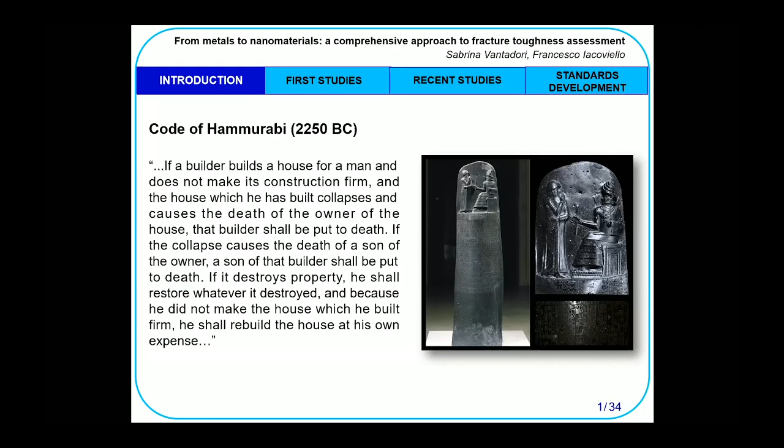Structural integrity was always an important issue for humanity. Already more than 4,000 years ago, it was written in the Code of Hammurabi that several punishments were set for problems like collapses of houses, including the death of the builder or the death of the son of the builder. It's a very hard time to be son of the builder.

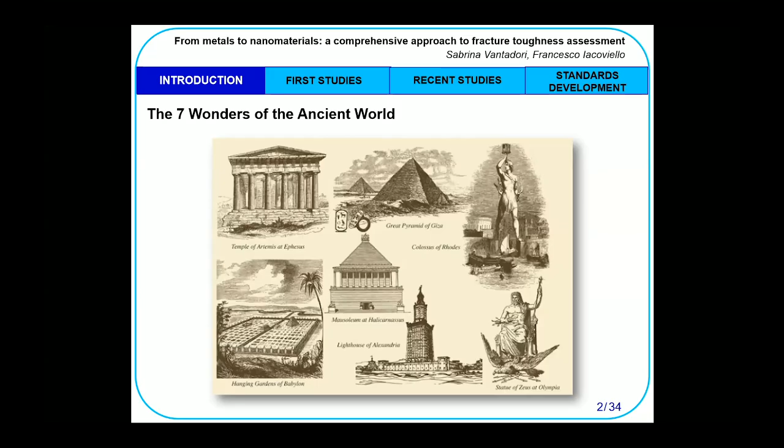Although they knew little about materials behavior and the principle of structural integrity, several wonders were built in the ancient world. Due to wars, earthquakes, and the passing of time, only one of them is still with us: the Pyramid of Giza. But we have some more recent wonders we can recall.

For example, the Pantheon's dome, which is up to now the world's largest unreinforced concrete dome, thanks to a combination of a coffered ceiling that reduces weight and the use of lighter materials like pumice or tufa for the upper rings.

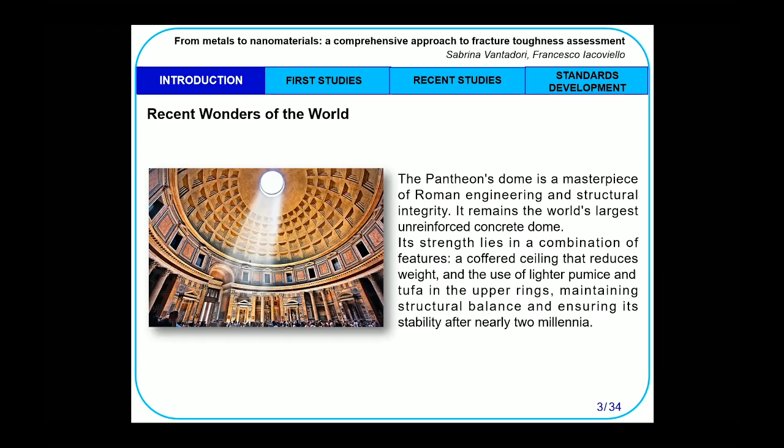We can also remember the Great Wall of China, which exhibits remarkable structural integrity despite its age and length. It is built with several materials, and it is one of the wonders of our world.

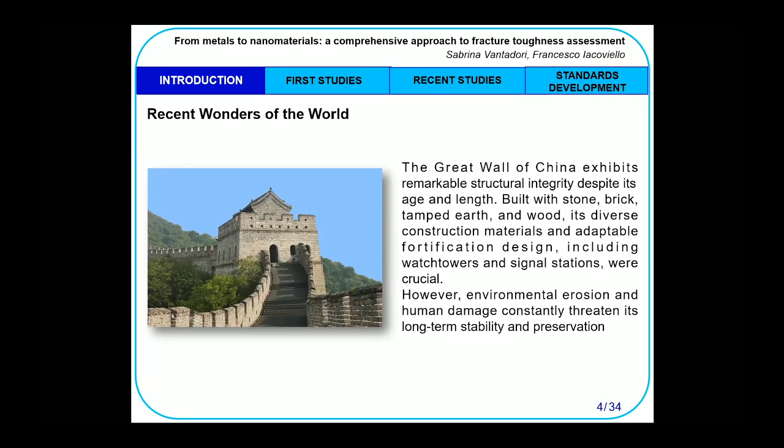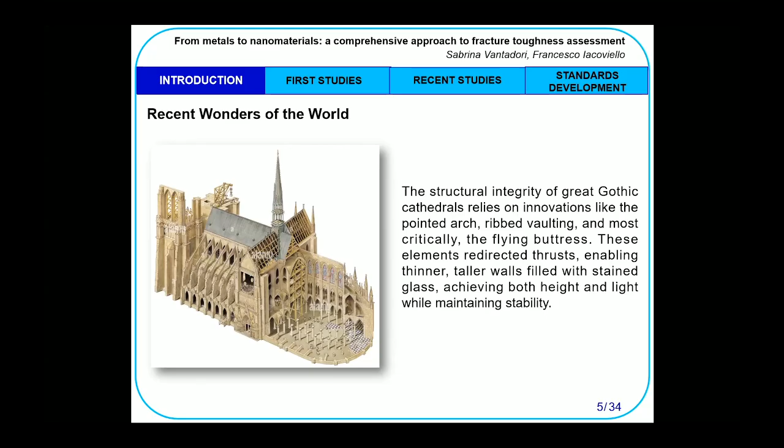And also we can recall the Gothic cathedrals, which show innovations like the pointed arch, rib vaulting, and the flying buttress. These allow higher walls with thinner thickness.

The first studies on the mechanical behavior of materials can be found with Leonardo da Vinci at the beginning of the 16th century, when he described in detail an experiment to measure the maximum weight sustainable by an iron wire, considering wires of different lengths. According to the thoughts of that age, he found that decreasing the length of the wire improved its resistance. But this was clearly a problem due to the limited capability for the production of these wires — with longer wires, the probability of having a defect was higher.

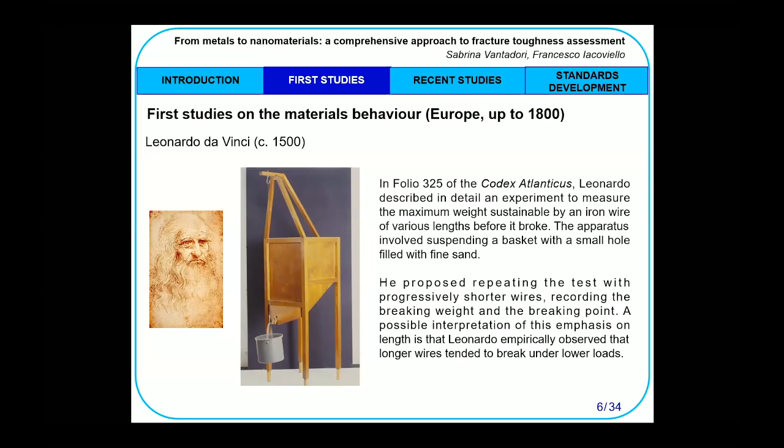One century after Leonardo da Vinci, we find the first scientific book dedicated to the study of materials: Discorsi e Dimostrazioni Matematiche Intorno a Due Nuove Scienze, by Galileo. There we find the first observation that the cross-section is the main geometrical parameter that should be considered for the mechanical resistance of a component, or specimen.

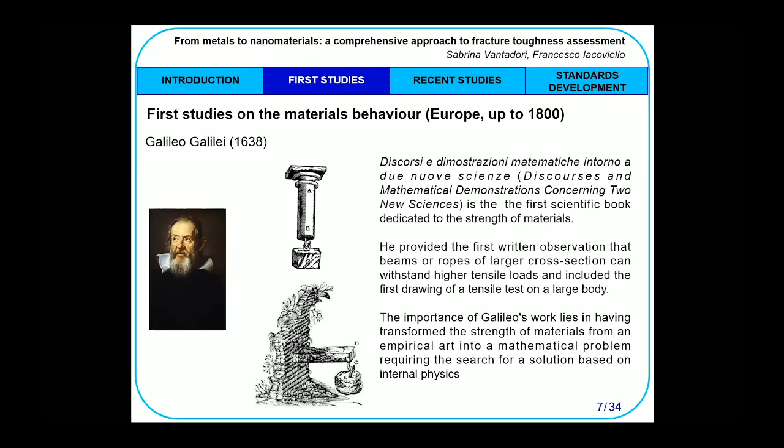In this case, we are talking about ropes, for example. We have the first drawing of a tensile test on a large body, and he also understood that the direction of loading was important in determining the mechanical behavior of a material.

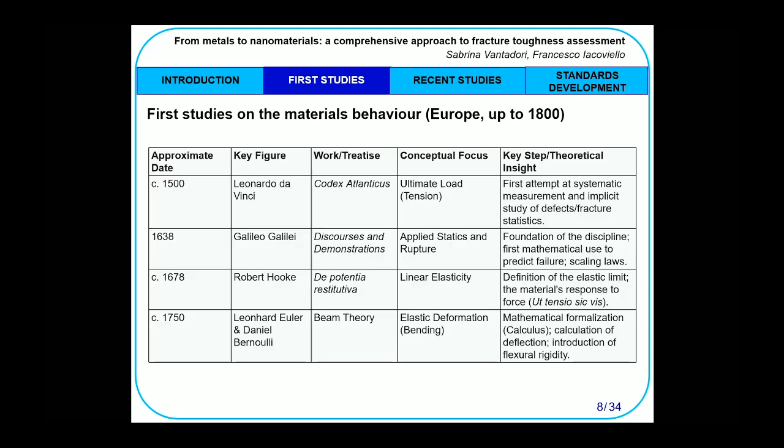In the years after, we have many other discoveries. For example, we can recall Robert Hooke, who was the first salaried scientist in European history, at least. We can recall the maxim 'ut tensio sic vis', which is the basis of linear elasticity.

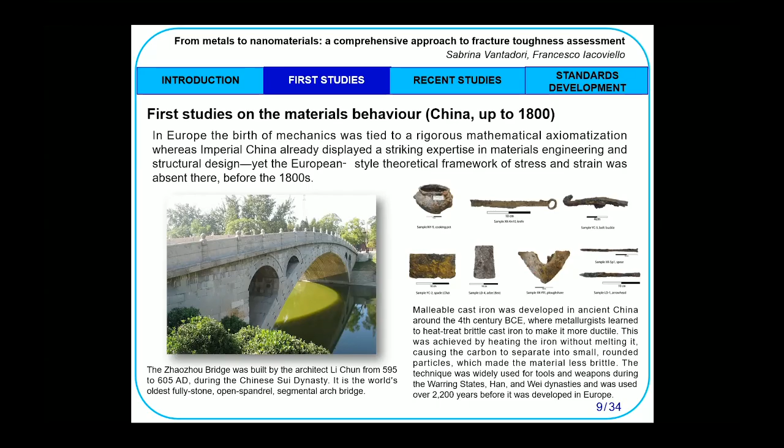Also, being a metallurgist, we can talk about malleable cast irons. These kinds of alloys were discovered in Europe at the end of the 18th century, but in China they were already produced in the 4th century before Christ — about 2,200 years before the discovery in Europe.

The crucial point for structural integrity is probably the Industrial Revolution. Up to the Industrial Revolution, the main components produced from metals were swords and guns, and the damaging mechanism was always connected mainly to overload.

With the Industrial Revolution, we have new ways of loading components, for example cyclic loadings, and we also have problems in some critical environments. So here we have a short list, but the problems became more evident.

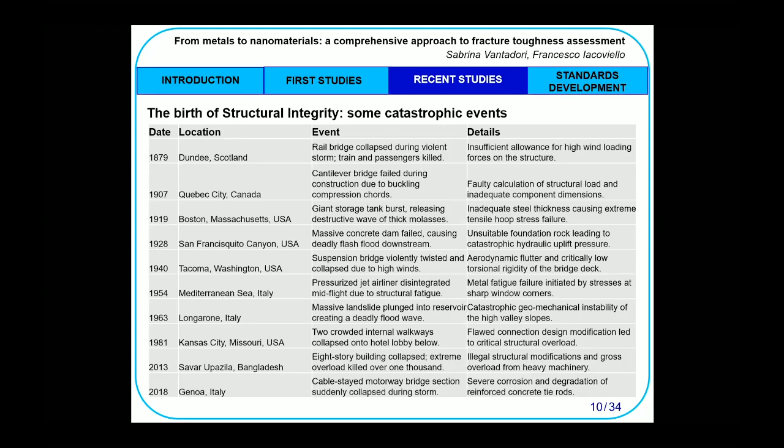A short list of catastrophes in the last two centuries concerning bridges, dams, trains, planes, etc. And with this revolution, we had a new damaging mechanism.

A really modern damaging mechanism is probably fatigue, because before the Industrial Revolution, repeated loading was not so frequent on a component. And as you can see, in the more or less 150 years, there are two approaches for the analysis of this mechanical behavior.

One approach was connected to analyzing the damaging mechanism in alloys, meaning identification of the crack as the reason for these problems, because in the early 19th century researchers thought there was a sort of mysterious transformation of the structure of the material from ductile to brittle. Instead, for example, Rankine, Fairbairn, and Ewing focused their attention on the nucleation and growth of fatigue cracks.

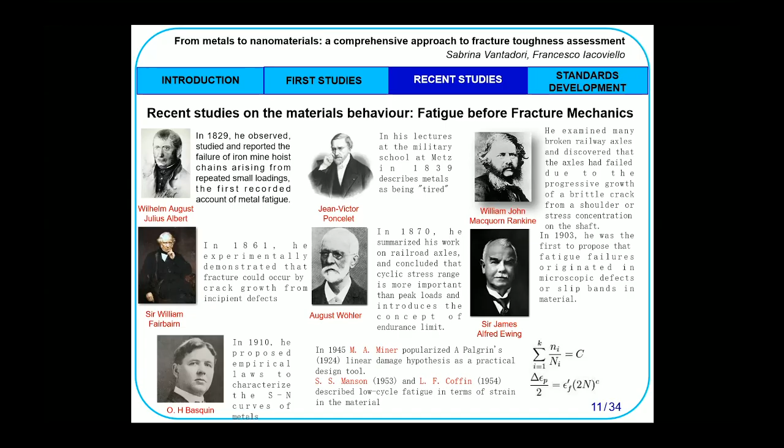But we also have another approach with the focus on fatigue life, determining the fatigue life for an applied cyclic load, for example with Wohler, on the determination of the infinite life condition.

At the end of the 19th century, it was clear that an approach based on the analysis of static load tensile data, or also the Wohler fatigue curves, must be reconsidered. You must remember that these fatigue curves were identified as Wohler curves only in the 1930s.

Anyway, it was evident that in case of sudden blow or severe environments, for example cold environments, these two approaches were not sufficient. In this case, the optimization of the Charpy test was clearly a new approach to analyze the behavior of components and materials.

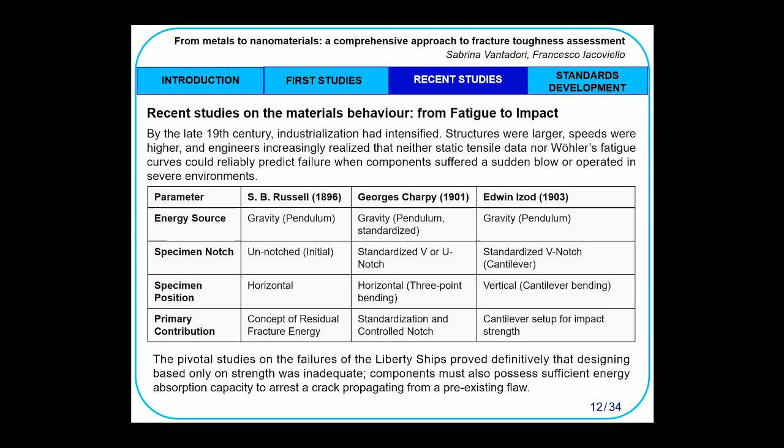This approach was really important. For example, it was the basis for the solution of the Liberty ships problems. There were cracks that could create big problems on these ships, which were produced with extensive use of welding. It also allowed determination of the ductile to brittle transition temperature.

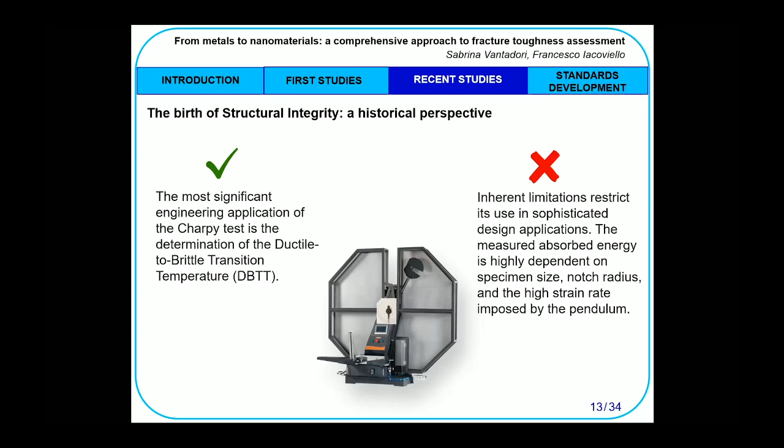But this test had some inherent limitations. First of all, as everybody here knows, the measured absorbed energy is highly dependent on the specimen size.

So in the beginning of the 20th century, we had the new science of fracture mechanics theory, with the first works of Griffith in 1920. Then we have Irwin in 1957 with the concept of K and K1C characterizing the brittle fracture resistance, the linear elastic fracture mechanics.

Obviously, J. Rice and the J-integral concept extended its applicability to elastic-plastic fracture mechanics. After this, there are obviously many other names, but I'm cutting for the limits of this presentation.

We have two important standards: ASTM E399, the standard test method for linear elastic plane strain fracture toughness of metallic materials, and the E1820 standard, the standardized method for measurements of fracture toughness.

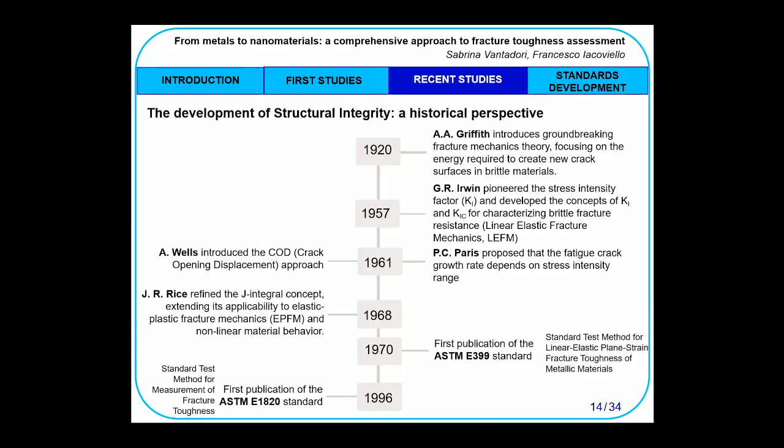Well, the path to these new standards is quite long. It was not determined in a few days or months. Just the year after Irwin's works, in 1958, the ASTM Technical Committee E24 on fracture testing of metals was established. In 1966, we had the E399-70T.

T stands for tentative standard. And after extensive round-robin test programs, only after that did we have, in 1970, the first publication of the E399 standard. Only 30 years after Irwin's results did we have the publication of the E1820 standard.

ASTM E1820 standard. And only 6 years ago, we had the new ASTM E1820 standard, removing the evaluation of K1C from this standard in order to avoid overlap with ASTM E399.

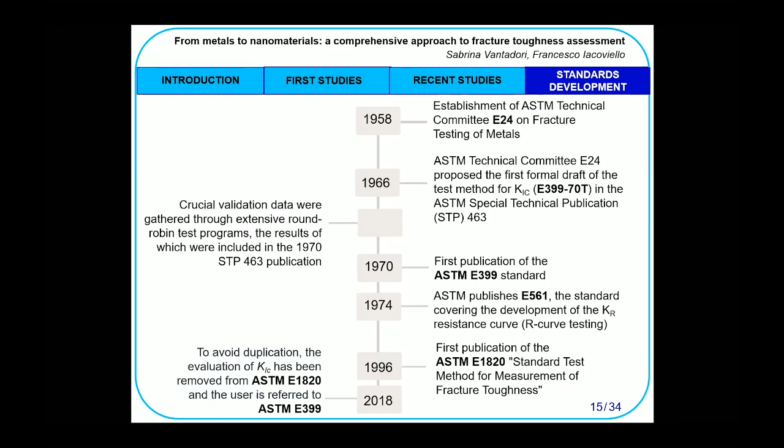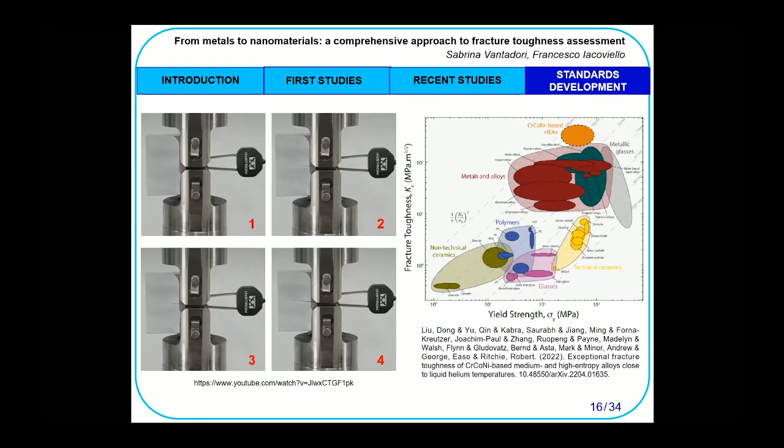While we have already seen how fracture toughness is addressed in metals, I will turn now to innovative materials and nanomaterials, where challenges and opportunities are quite different.

It's well established that methods for computing fracture toughness, once confined to highly specialized fields, are now rapidly expanding into more traditional branches of engineering, as standards originally developed for metallic materials are being extended to applications involving, for example, concrete and rocks. In parallel, advances in material research have not only refined procedures for traditional tests, but also fostered the development of entirely new investigative methods.

In this context, my presentation will focus on two types of advanced materials: an innovative earth-based material and a nanomaterial, presenting a method to compute fracture toughness for each.

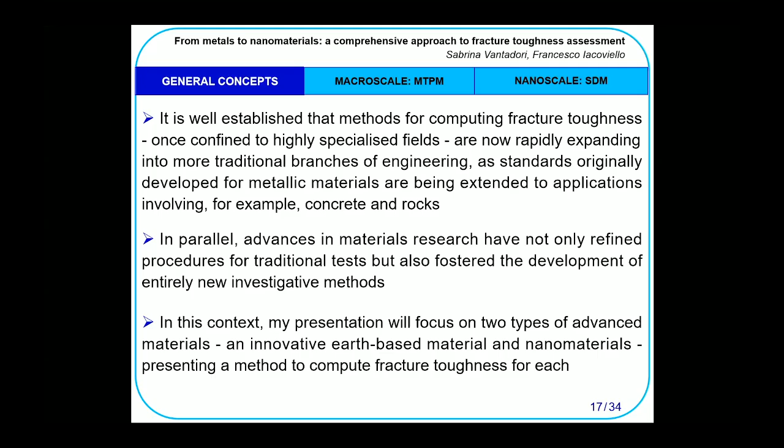Let's start the discussion with a proposed procedure for fracture toughness evaluation of quasi-brittle materials. The main feature of this method, called the modified two-parameter model, is its ability to account for possible crack deflection or kinked crack even under far-field mode 1 loading, and to assess its effect on fracture toughness.

The method builds upon the framework of the original two-parameter model proposed by Shah et al. to determine the mode 1 plane strain fracture toughness of plain concrete, and incorporated into RILEM recommendation. Therefore, I will begin by outlining the main steps of the original method.

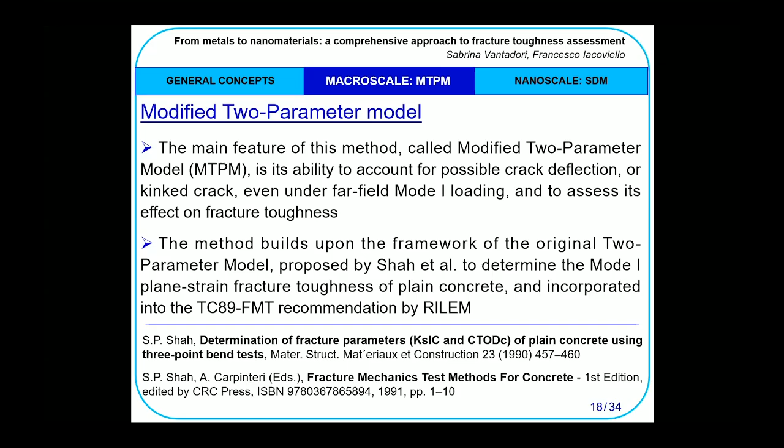The specimens have prismatic shape and present a notch in the middle part, in the lower part of the middle cross-section. The specimens are tested under 3-point bending and crack mouth opening displacement control.

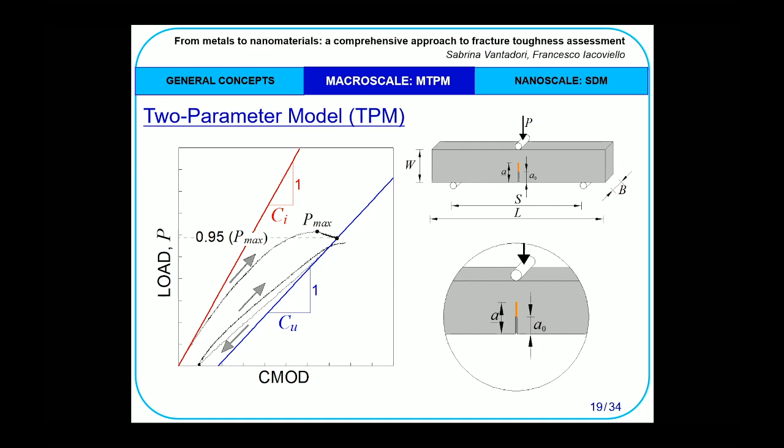More precisely, the specimen is monotonically loaded up to the peak load Pmax. Then the post-peak stage follows, and when the force is equal to about 95% of the peak load, the specimen is fully unloaded and then reloaded up to failure.

The elastic modulus, according to Tada et al., is computed by exploiting the specimen geometry and the measured initial compliance CI.

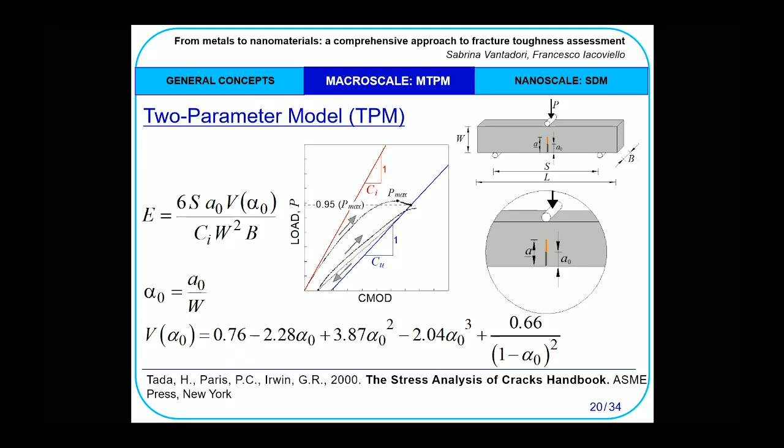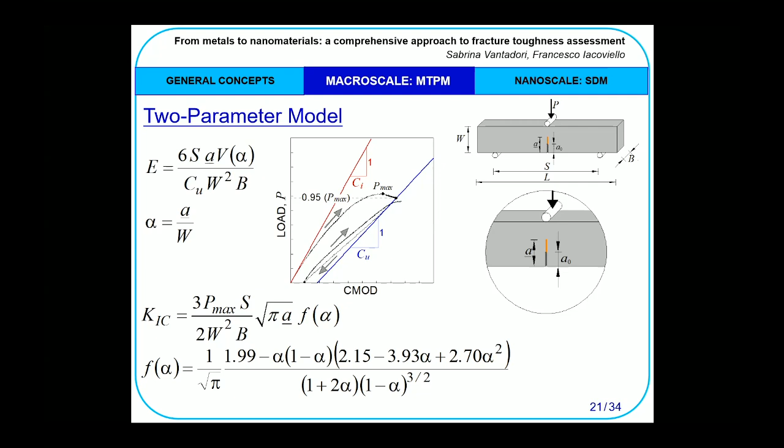Assuming a crack propagation under pure mode 1 loading, the effective critical crack length A is computed from the measured unloading compliance Cu, while the fracture toughness is obtained from the maximum load Pmax and the function reported. But what happens when the crack propagation is under mixed mode loading?

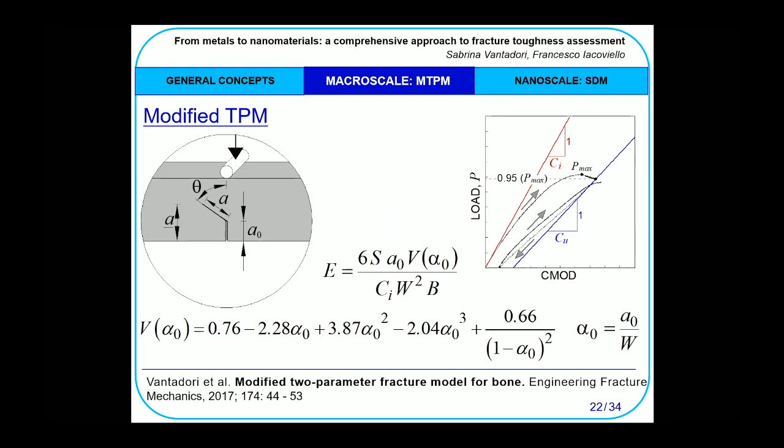A modified procedure is proposed, assuming a kinked crack with one branch characterized by an orientation theta. The elastic modulus is calculated as previously discussed, while for the effective critical crack length, the calculation needs to distinguish between the case of a crack with a short branch and that of a crack with a long branch, since the energy release rate changes accordingly.

The boundary between these two cases is represented by the ratio A1 over A0 equal to 0.3.

When the crack has a long branch, the crack is assumed to consist of two segments, named A1 and A2. In this case, a new expression of the elastic modulus is derived, from which the length A2 can be computed and consequently A. The fracture toughness is computed as previously discussed.

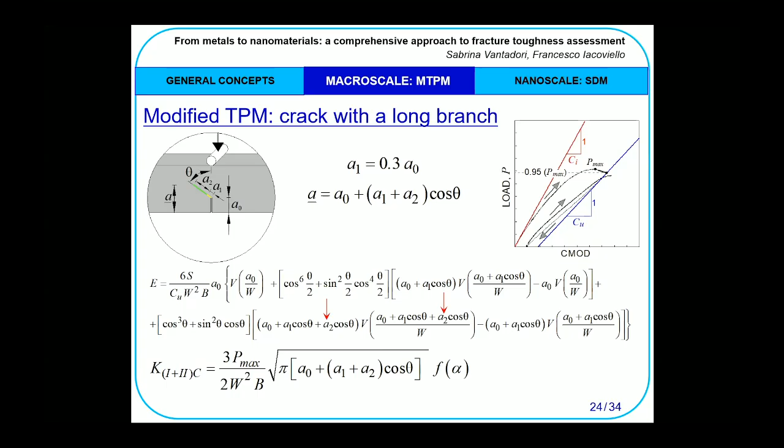But now let us move to the application of the proposed procedure to an innovative earth-based material.

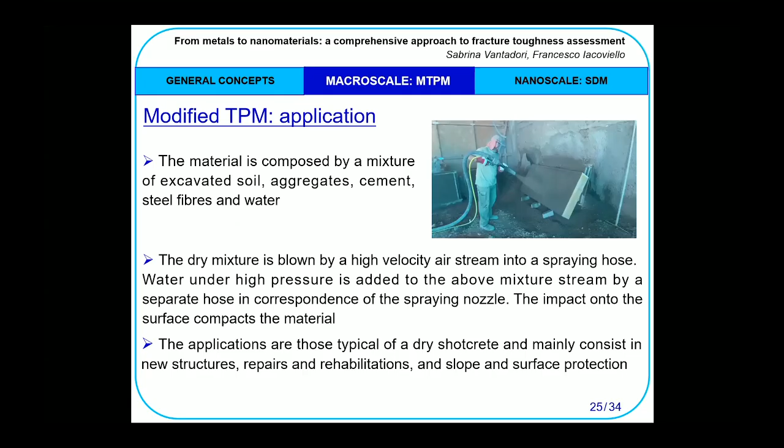The applications are those typical of dry shotcrete and mainly consist of new structures, repairs and rehabilitation, and slope and surface protection. More precisely, the material here examined consists of 7 parts excavated soil, 7 parts aggregate, 2 parts cement for stabilization of soil, 1.5% steel short fibers by volume, and about 3% water.

The formwork panel is left to cure at about 33 degrees of temperature and about 50% relative humidity for about 2 months. The specimens for fracture toughness evaluation are extracted from such a panel.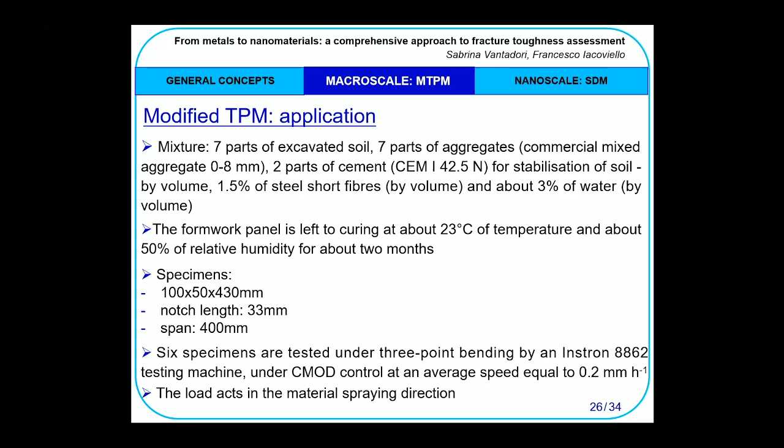Six specimens are tested under 3-point bending using an Instron 8862 testing machine under crack mouth opening displacement control, employing a clip gauge at an average speed equal to 0.2 mm/hour. The load acts in the material spraying direction.

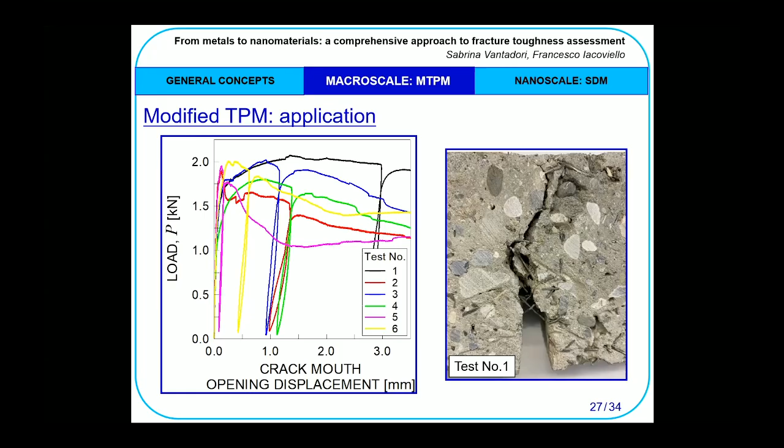The average value of the fracture toughness computed by applying the modified two-parameter model is equal to 1.16 megapascal square meter. The corresponding value obtained by applying the original method, that is the two-parameter model, is equal to 1.274 megapascal square meter. Therefore, the method proposed provides a lower value of the fracture toughness, less than about 9%, with respect to that provided by applying the two-parameter model, which can be regarded as a conservative result.

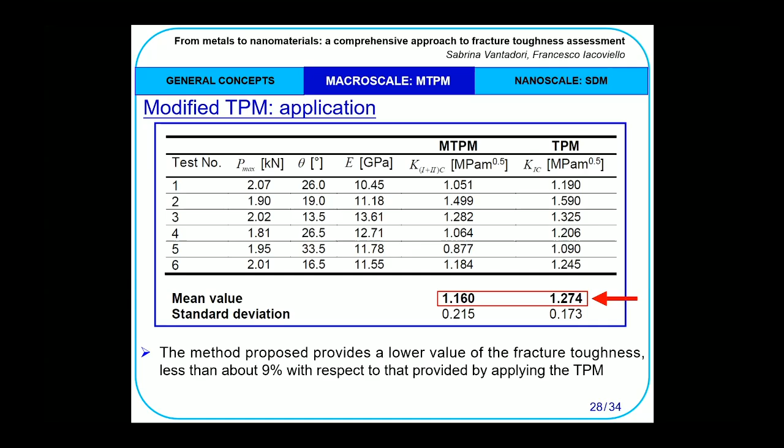Now, let us move to the procedure proposed to evaluate the fracture toughness in nanomaterials, that is, structures with one or more sizes measured in the nanometer scale range and manifesting the so-called size effect.

The method here proposed to compute the fracture toughness follows the same framework as the D5528-1 ASTM standard, proposed for laminates with a polymer matrix, here briefly summarized. The specimen consists of a double cantilever beam containing a pre-crack with a length L. The ends of the specimen are open and the load, the force F, and the length L are recorded at the time instant when crack propagation is visually observed on one side of the specimen by means of a microscope.

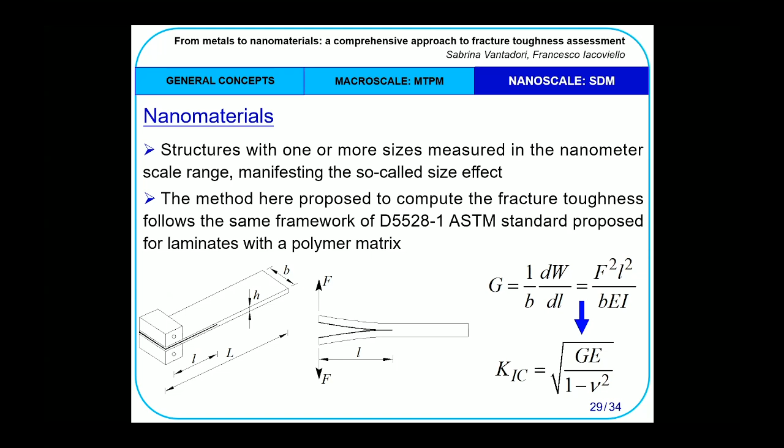The fracture toughness is computed from the energy release rate by assuming a plane strain condition.

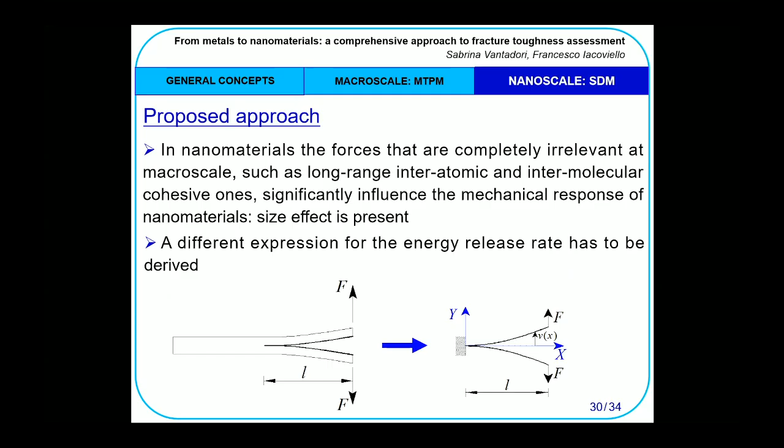Moreover, in nanomaterials, the forces that are completely irrelevant at the macro scale, such as long-range interatomic and intermolecular cohesive ones, significantly influence the mechanical response of nanomaterials, that is, size effect is present. Therefore, a different expression for the energy release rate has to be derived in order to take into account such a size effect. Let's model the testing setup by a double cantilever beam.

Firstly, a novel theory named stress-driven non-local model is employed to derive the transverse displacement of a cantilever beam with a length L and loaded by a force F. The material characteristic length LC reported in the displacement relationship is related to the material microstructural properties, such as lattice sizes, grain sizes, or atomic bond length.

Then, by exploiting the energy release rate definition and the Castigliano theorem, the energy release rate expression is derived, where lambda is the normalized material characteristic length, that is equal to LC over L. Finally, the fracture toughness is obtained from the energy release rate by assuming a plane strain condition.

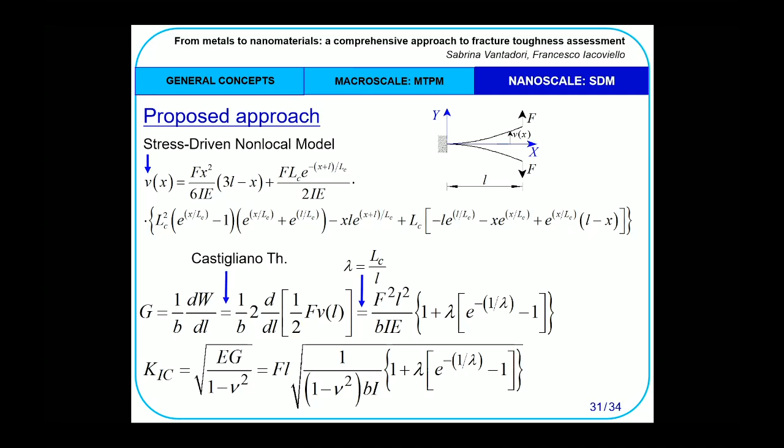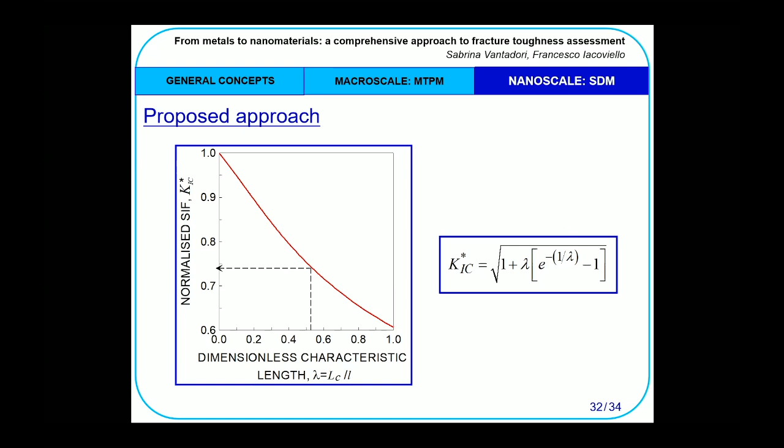Now let us move to the application of the proposed procedure for fracture toughness evaluation of crystalline silicon with a 100 crystallographic orientation.

The material was experimentally analyzed by Jaya et al., by considering different testing configurations and obtaining a value of the fracture toughness equal to 0.8 megapascal square meter. Among the different testing configurations analyzed by the authors, that of a single

cracked cantilever microbeam with sizes 5 by 20 microns is here considered for lambda calibration. The crack had a length of 2.3 microns, perpendicular to the beam axis, and located at a distance of 2.5 microns from the constraint end. Five specimens were tested.

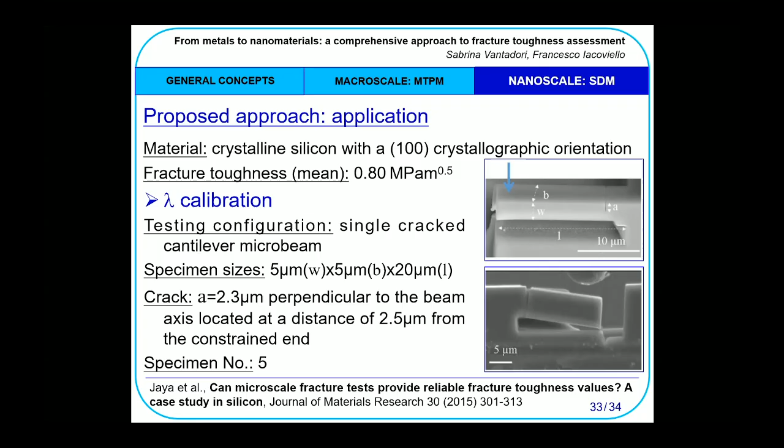By applying the relationship proposed, the fracture toughness is computed, obtaining a value equal to 0.83 megapascal square root meter, by assuming a value for the classical solution equal to 0.95 megapascal square root meter. It can be observed that the result obtained is in satisfactory agreement with the experimental data, experiencing an error of less than 4%.